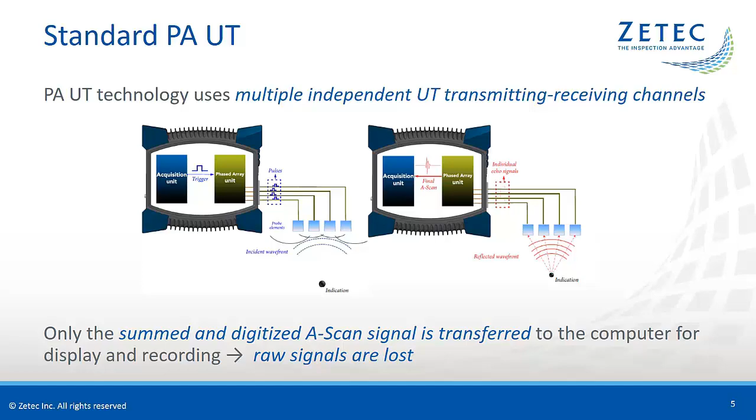This slide shows how it works in practice. The probe is positioned on a specimen, and the phased array equipment generates a group of summed A-scans that are displayed as a sector scan image with a range of beam angles to cover the volume and to detect the reflectors. This image is shown live on the screen of the unit and can also be saved during inspection.

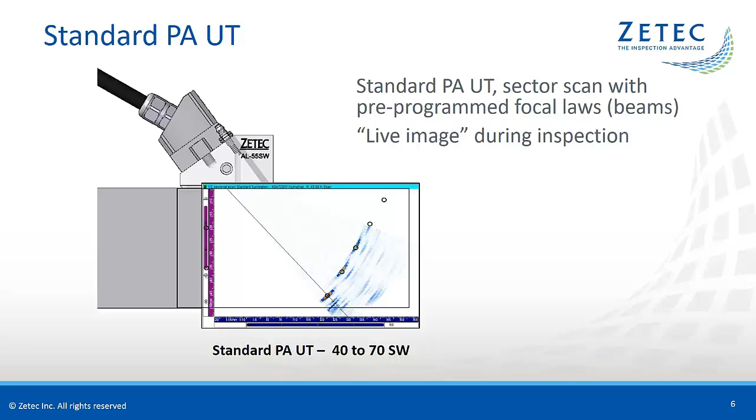After recording, we can apply processing, for instance, volumetric merge, but we cannot create additional focal laws. With the full matrix capture or FMC technique, the elementary A-scan signals from every transmitter-receiver pair are captured and recorded. Like the image on this slide shows, the elements of the probe are pulsed one by one, and for each pulse, the reflected signals are received on each element.

At the end of the sequence, for a probe with 4 elements, a matrix of 16 A-scan signals is recorded. For a more realistic situation, a probe with 64 elements, we will have a matrix of 4096 A-scans. From the raw A-scan signals, it is then possible to generate UT images for any given focal law in terms of aperture, angle, or focus depth, and for advanced focusing techniques through post-processing and recently also live during inspection.

Indeed, the underlying mathematics for the processing of FMC data was described more than 10 years ago. But in recent years, a drastic increase in processing power allows to perform the summing operations while the probe is moving over the component. So the time-consuming storage of elementary FMC data can be avoided, and the resulting inspection speed becomes comparable to standard phased array.

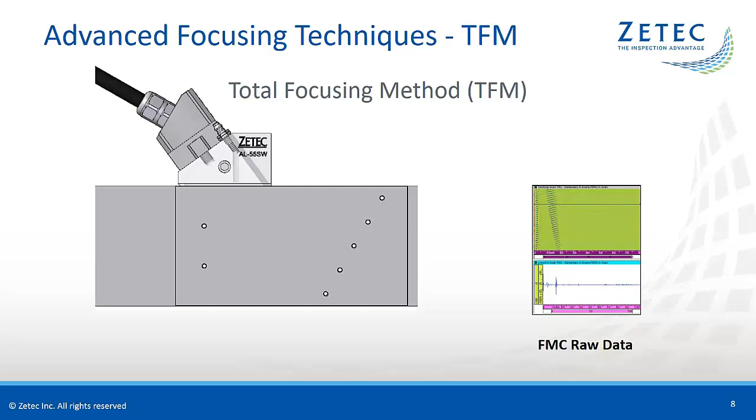The most commonly used advanced focusing algorithm is the total focusing method, or TFM. This animation explains how it works. The TFM algorithm sums the elementary A-scan signals from all elements in the array to generate a frame of pixels, where each pixel is computed using a dedicated focal law. The TFM frames can be used for live interpretation, or they can be stored for each position of the probe, very similar to a dynamic merge view in regular phased array.

In theory, ideal focusing is achieved in each point of the frame. But I will show later that the focusing capability of the technique still depends on the acoustic wavelength and the total aperture of the array. Therefore, some conditions must be met to effectively obtain ideal focusing.

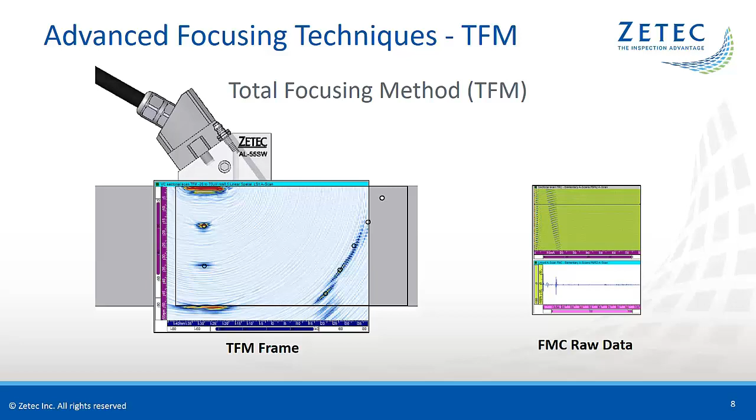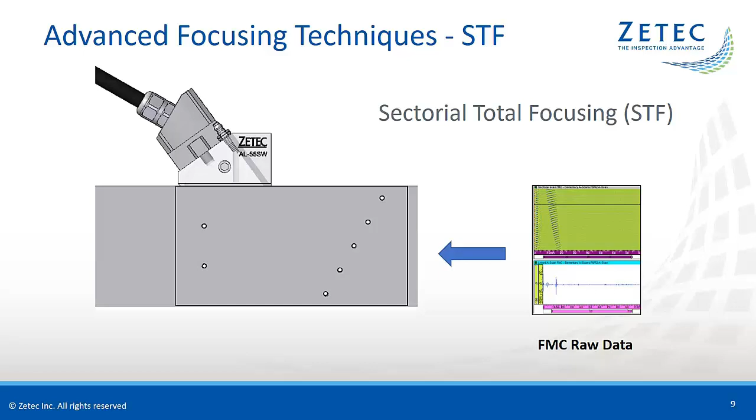The elementary A-scans from the FMC data recording can also be used with an alternative processing method to generate a sectorial sweep of A-scans while focusing in each point along the sound path. We will call this technique sectorial total focusing, and its physical principle is very similar to a DDF or dynamic depth focusing algorithm, applied both in transmission and in reception.

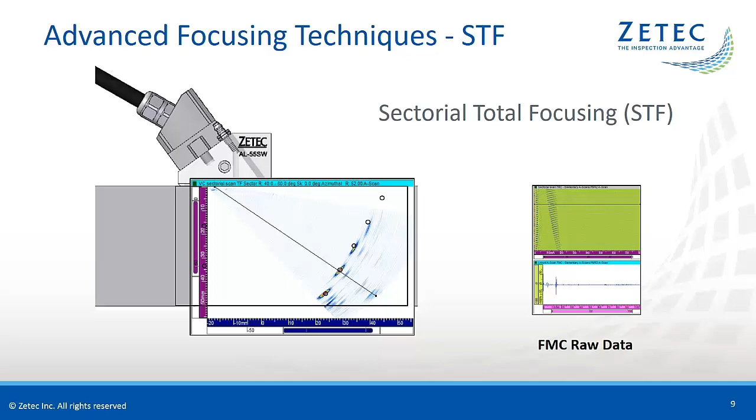Again, the operator can perform online data interpretation, or the images can be recorded during an encoded inspection sequence. The algorithm has the benefit of recording a summed A-scan signal for each angle, very similar to standard phased array, and this might facilitate its acceptance in codes and standards.

Let me now introduce Zetec's latest hardware innovation in phased array UT. At the end of last year, we launched the TOPAZ 64, a high-end, fully integrated portable unit. It has a 64-128 PR phased array configuration that allows for two-side inspection of thick welds with 64-element active aperture probes. This and the two separate conventional TOFD channels at 200 volts make it a best-in-class inspection system for code-compliant weld inspections using simultaneous phased array and TOFD.

But in addition, the TOPAZ 64 also offers best-in-class live high-resolution TFM and STF. The TOPAZ 64 allows to perform an encoded scan, motorized or manually driven, and records live TFM frames or STF sector scans at each position, just as we record sector scan images in standard phased array. After the recording, the TFM is available as an actual merged data group in UltraVision Touch, and the STF data can be exploited like a standard phased array sector scan.

In addition to the typical square pulse, 75 volts on 50 ohms, the system can also generate a bipolar pulse, 150 volts peak to peak on 50 ohms, with 40% more acoustic energy. Obviously, this contributes to the overall signal-to-noise ratio of the ultrasonic signals, either standard or generated from elementary A-scans. The unit is also capable of saving the raw FMC data for post-processing in UltraVision Classic. And like the other TOPAZ units, the TOPAZ 64 is controlled by the industry-proven embedded UltraVision Touch software.

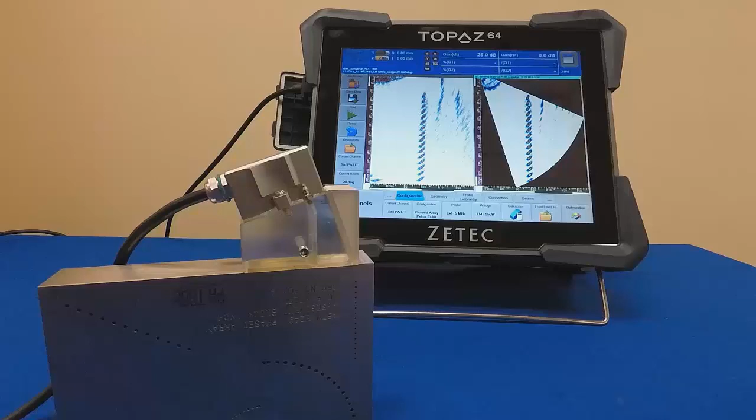Before looking at real flaws in the case studies, let me start by illustrating the benefits of advanced focusing techniques and the key parameters that allow to exploit the full potential of this new technology. I will use the well-known ASTM E2491 phased array reference block with different sets of side-drilled holes, and a typical 5 MHz linear array probe with 64 elements coupled to an L-wave wedge.

We are looking at ultrasonic images of a set of 1 mm diameter side-drilled holes located on a vertical line. Two channels are shown simultaneously on the TOPAZ 64. On the left side of the screen, we have a high-resolution TFM frame, 512 by 512 pixels, generated with the complete 64-element aperture of the probe.

The calculator in UV Touch shows the coverage of the frame relative to the specimen and makes it easy to set and adjust the parameters of the frame. On the right side of the screen, we have a standard phased array sector scan showing angles between 20 and 70 degree L waves and a resolution of 0.5 degrees. Again, the complete 64-element aperture is used. The standard phased array channel is focused in projection mode, just in front of the wedge.

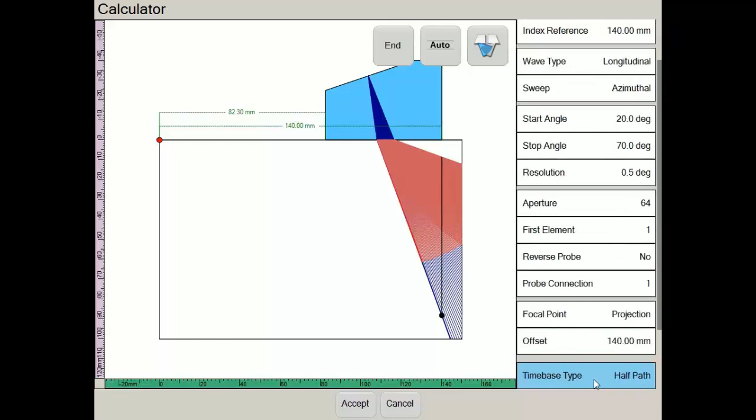In the starting position, we can see that the TFM algorithm, in combination with the large aperture of the probe, allows for ideal focusing on all reflectors. At this specific probe position, the standard phased array sector scan is also well focused on all reflectors and shows a similar, nearly perfect image.

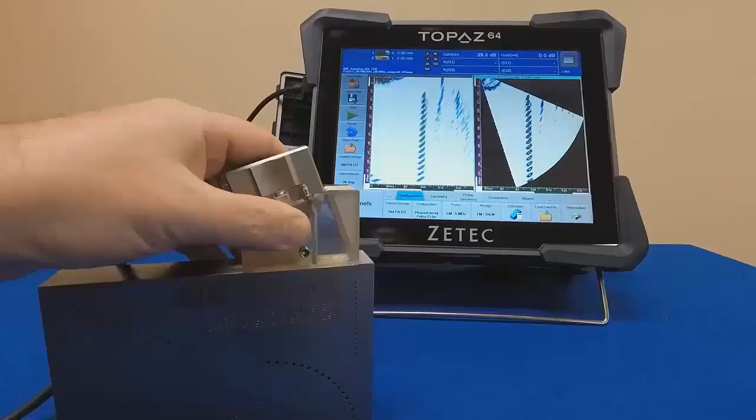When we start moving the probe by roughly 10 millimeters in one direction or the other, we can observe that the image provided by the standard phased array technique shows defocusing on most of the reflectors, simply because the sound field is focused elsewhere. On the other hand, for the TFM technique, nearly ideal focusing is conserved over a large range of probe positions. This clearly illustrates the capability of TFM to focus in the complete region of interest and not only on a predefined locus.

I have now replaced the TFM channel on the left side of the screen by an STF channel with the same angle sweep as the standard phased array channel. And we perform the same test again, starting from the ideal position for the standard phased array and moving the probe away from that position. And very similar to the live TFM technique, the live sectorial total focusing technique conserves nearly ideal focusing over a large range of probe positions.

As previously mentioned, the active aperture of the probe is a key parameter for the focusing capability. This slide clearly illustrates the influence of this active aperture on the TFM imaging. Live TFM images of the same set of side-drilled holes were recorded with different apertures. From left to right, 64, 32, and 16 elements of the probes were used to generate the TFM frames. The images show that a large aperture is required to fully benefit from the focusing power of the TFM algorithm, and the same can be demonstrated for the STF.

Indeed, even when advanced focusing algorithms are applied, the focusing capability is still limited to the near field of the probe. And this near field can be increased by selecting a probe with a larger active surface or a probe with a higher frequency. Let us now look at the influence of the TFM frame resolution on the detection capability and the reliability of the inspection.

We start from the same setup that we used a few minutes ago, showing a TFM frame of 512 by 512 pixels. We can see the TFM frame on the left side of the screen and the amplitude depth curve on the right side of the screen. This curve is like the A-scan signal of a virtual 0-degree probe in each horizontal position of the TFM frame. The different echoes represent the responses from the side-drilled holes, and we can see a regular sensitivity distribution.

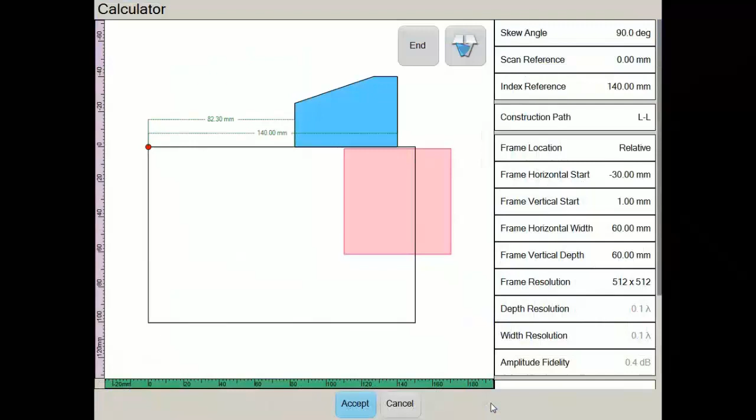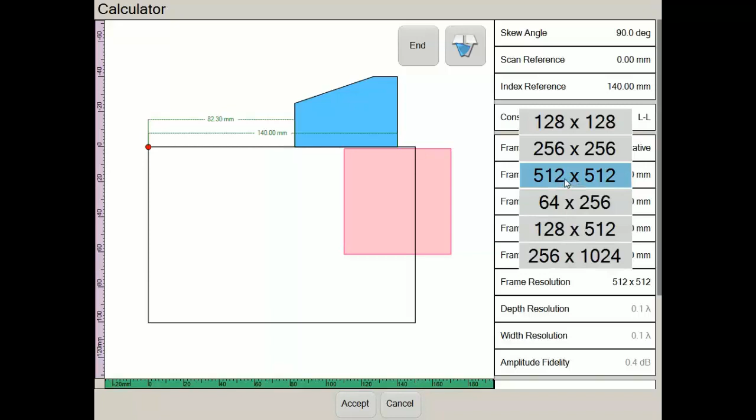If we go into the TFM calculator, we can see how to define and adjust the frame by defining the frame start and frame extent horizontally and vertically. The frame resolution will determine the depth and the width of the individual pixels in the frame. Let us now change the frame resolution to 128 by 128 and look at the image again. The TFM image has a very different aspect now. It looks pixelized. Also, the A-scan signal on the right shows irregular amplitudes for the echoes from the reflectors.

When moving the probe very slightly, actually less than a millimeter, we can observe random and important variations in the echo amplitudes, as if some reflectors are disappearing and reappearing. The pixelized aspect of the TFM frame can be improved by applying the smoothing feature available in UltraVision Touch, but the important amplitude variations remain. Obviously, an actual inspection with these parameter settings would be very unreliable and could leave flaws undetected. The TFM calculator in UltraVision Touch helps the operator understand and avoid this potential issue.

We can see that the pixel size for a 128 by 128 frame is as large as 4/10 of a wavelength. Using the wavelength as the unit for the pixel size may seem a little strange at first, but it avoids the UT operator having to calculate the wavelength for each of his probes and wave modes. From a physical reasoning, similar to the Nyquist or sampling theorem that the ASME code uses to determine the recommended digitizing frequency for standard UT and phased array inspections, the maximum possible amplitude error for a TFM frame can be calculated. We have implemented this principle in our software to automatically calculate the amplitude fidelity parameter to help the operator set up TFM configurations for reliable detection.

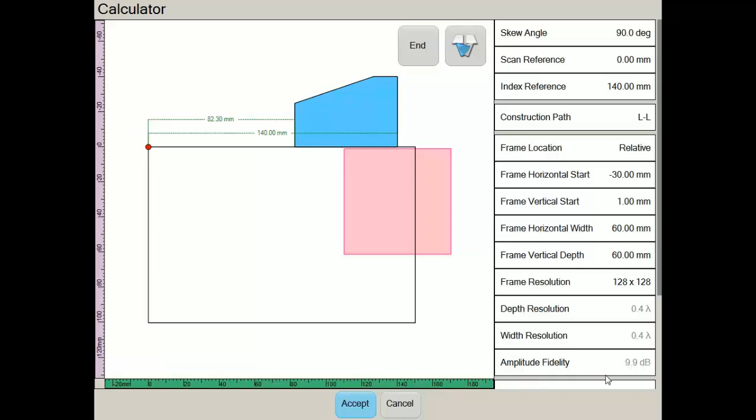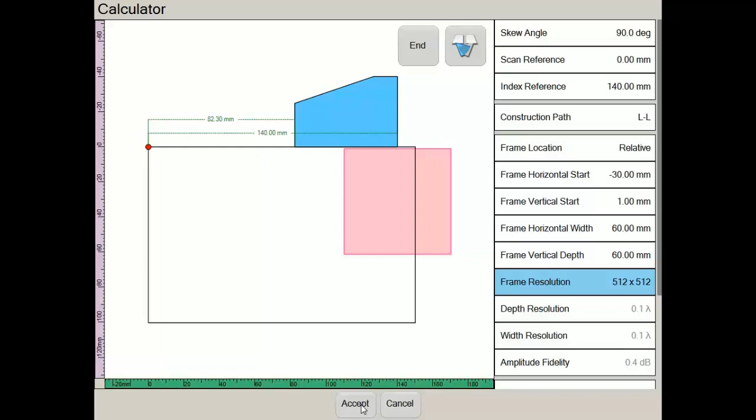For the given frame size and 128 by 128 resolution, we can see that the parameter is at almost 10 dB, which explains the important amplitude errors that we previously observed. If we go back to a 512 by 512 frame, we can see the pixel size reduced to a tenth of a wavelength, and the amplitude fidelity improved to less than 0.5 dB. Obviously, this setting results again in the initial high-resolution TFM image.

In the various working groups on the codification of FMC and TFM, the discussion about recommended pixel size is still ongoing, but at this time, an amplitude fidelity of 2 dB or better is considered a good compromise between reliability and inspection efficiency. I think this simple experiment clearly illustrates the importance of the TFM frame resolution, especially when inspecting thicker components.

Let us now move on to the case studies. In the first case study, we will evaluate the performance of the TFM technique on hydrogen-induced cracking. This is a common type of damage occurring in wet hydrogen sulfide refinery process environments, even at relatively low temperatures. Hydrogen-induced cracking is a kind of blistering damage that tends to form parallel to the surface. It becomes really damaging when it becomes extensive, or when it gives rise to cracking that propagates into a weld, or when it begins to go stepwise through the wall.

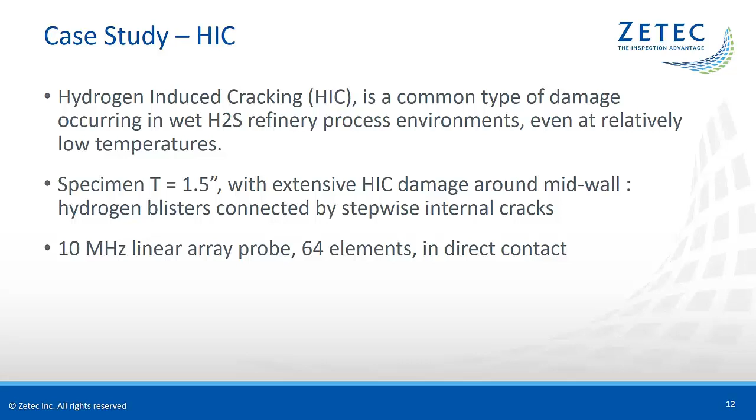The considered specimen is about 1.5 inch thick and has strong hydrogen damage around mid-wall, the typical blisters connected by stepwise internal cracks. A 10 MHz linear array probe with 64 elements was used for the examination, in direct contact with the specimen. This slide shows the UT images of the damage inside the specimen. On the left side, we see the image from a compound scan technique using L waves ranging from -15 to 15 degrees and an aperture of 32 elements.

On the right side, we see a TFM frame with 512 by 512 pixels, covering the same volume of the specimen. The damage in this specimen is so extensive that standard phased array has no difficulty detecting it. Indeed, the different blisters, essentially perpendicular to the ultrasonic beams, are very good reflectors. But the raw sector scan doesn't show the complete detail of the damage.

The data from the live TFM inspection provides a more accurate image of the stepwise internal cracks that connect the adjacent hydrogen blisters. In this case, the superior imaging of the TFM technique is obtained by the better focusing capability, but also because the original FMC data recording includes signals from a multitude of insonification angles on the reflectors that compose the damage.

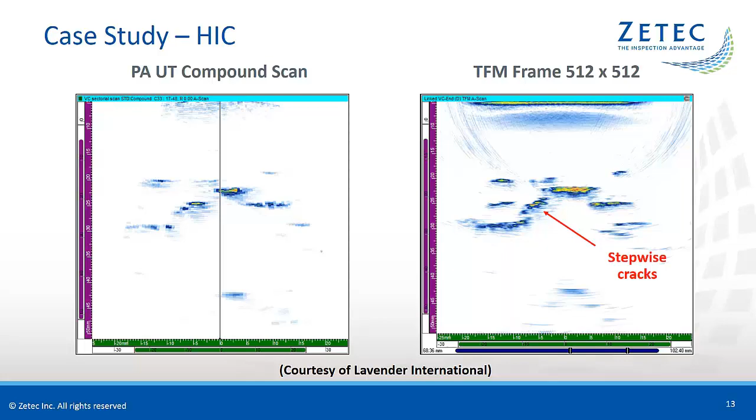High temperature hydrogen attack, or HTHA, is another hydrogen-related damage mechanism. This problem concerns steels operating at elevated temperatures, above 400 Fahrenheit, in hydrogen environments in refinery, petrochemical, and chemical facilities. HTHA is the result of hydrogen dissociating and dissolving in the steel, and then reacting with the carbides to form methane, which cannot diffuse out of the steel. The methane accumulates at grain boundaries and eventually leads to the fissures and cracking typical of HTHA.

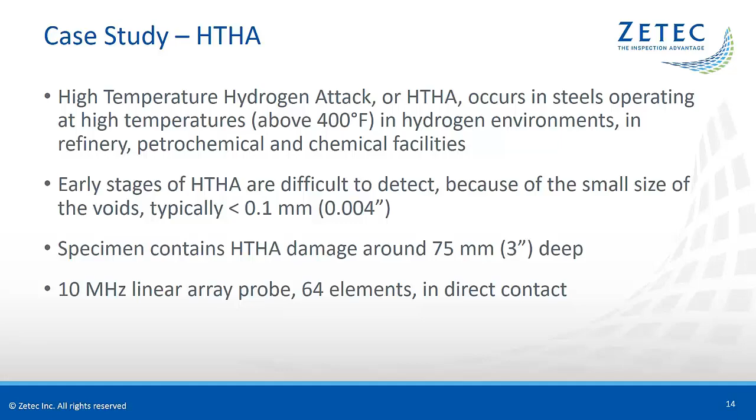Early stages of HTHA are very difficult to detect because of the small size of the voids, typically smaller than a tenth of a millimeter. The considered specimen contains important HTHA damage at the depth of roughly 3 inches. The same 10 MHz linear array probe from our first case study was used. This slide shows the recorded TFM data on the specimen, again with frames of 512 by 512 pixels. We can observe that the high frequency probe, in combination with the TFM focusing, allows to detect reflectors several times smaller than the wavelength.

Industry experts consider that the excellent focusing capability of TFM is an important tool for earlier detection and better characterization of HTHA. Still, in view of an efficient and reliable inspection strategy for this damage mechanism, TFM is likely to be combined with other ultrasonic techniques like TOFD. With TOPAZ 64, all required techniques can be implemented on the same portable unit.

The next case study will illustrate the flexibility and the performance of TOPAZ 64 and UltraVision Touch in using live TFM for weld inspection. For our trial, we have a carbon steel weld specimen with a wall thickness of 19 millimeters or 3/4 of an inch. It contains typical manufacturing flaws: lack of fusion, incomplete penetration, a toe crack, and a cluster of porosity. The weld will be inspected with TFM from both sides in a single scanning sequence.

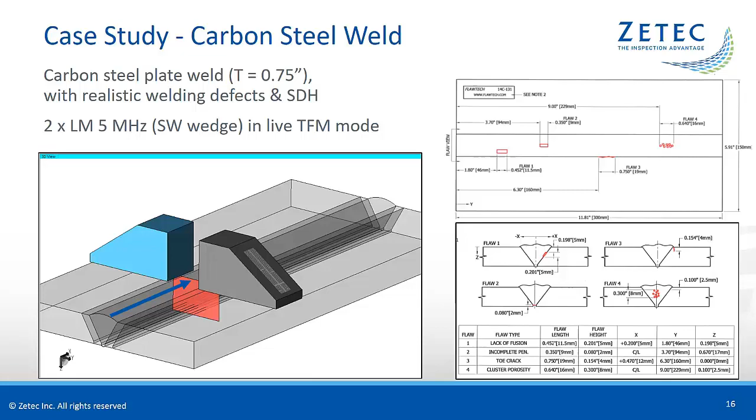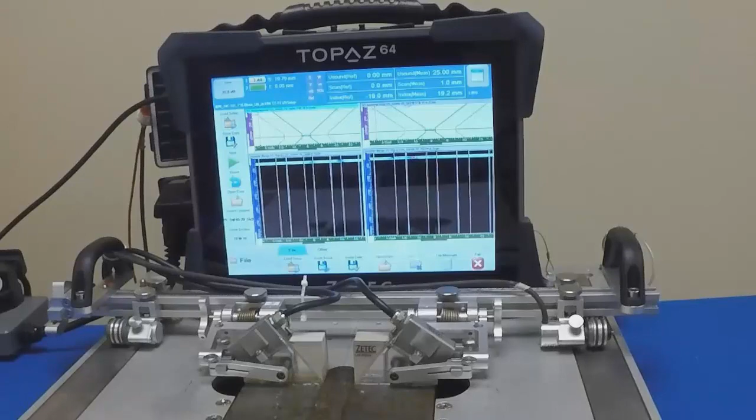The Zetec weld crawler is used to carry the probes for this one-line scanning sequence. But the TOPAZ 64 and the onboard software also integrate smoothly with other encoded and motorized scanning mechanisms. In this case study, only the live TFM frames are recorded. No raw FMC data will be stored.

This allows for a scanning speed around 25 millimeters per second, while recording frames every millimeter. This is only slightly slower compared to two-sided standard phased array with similar inspection parameters. The live TFM data file size for this type of weld is around 350 megabytes for a weld length of 1 meter. This is roughly double the size of the standard phased array.

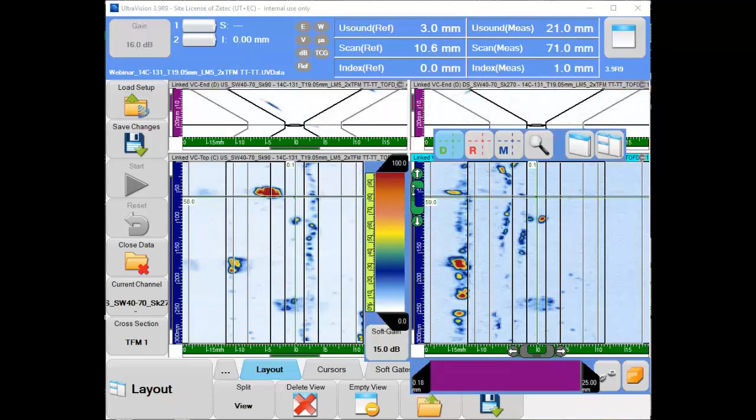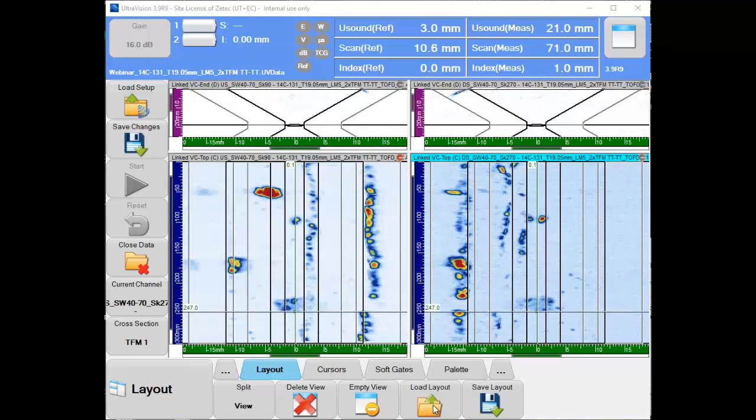After recording, the UltraVision Touch software can be used to review the data, either on the TOPAZ 64 unit or on a separate computer. Upon loading the data file, we get an overview of the two TFM channels for upstream and downstream. By moving the data cursor along the scan axis, the 4 manufacturing flaws are clearly detected on the TFM frames. Since each of the TFM data groups includes full volumetric data, we can also use the projection views for efficient analysis of each indication and for flaw characterization and sizing.

The recorded TFM data groups have exactly the same format as the results from a volumetric merge operation. It is easy to use the projection gates to isolate and visualize individual flaws, like the near surface toe crack with well-resolved corner and tip signals. We can also observe the capability of the TFM technique to provide better resolution for imaging the cluster of porosity compared to standard phased array.

Let's now move on to a case study performed to explore the potential of advanced focusing techniques on thick carbon steel vessel welds, let's say from 3 inches and up. We know that code-compliant phased array UT and TOFD can provide adequate detection, but the characterization of deeper indications can be sometimes challenging. The considered specimen is a thick carbon steel weld containing real flaws, a root crack, and a cluster of shrinkages, located at different depths in the weld.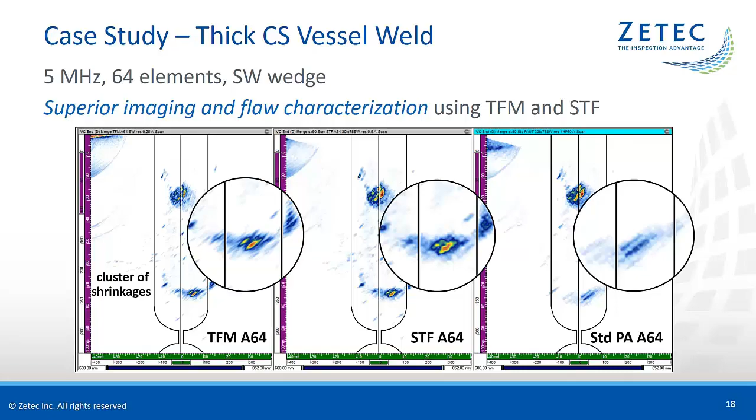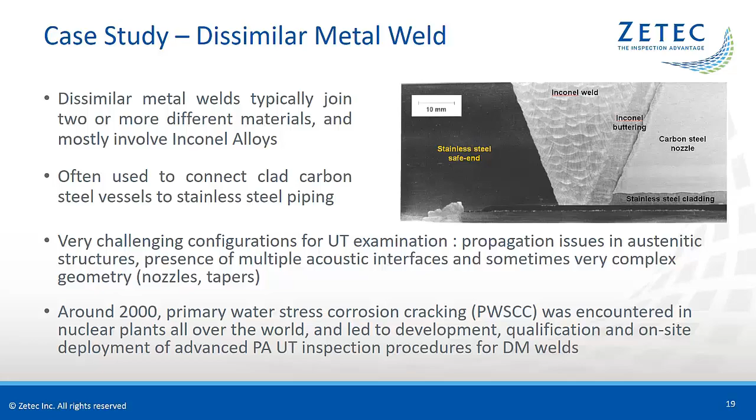Around the year 2000, a new damage mechanism called primary water stress corrosion cracking, or PWSCC, was encountered in nuclear plants all over the world and led to the development of advanced phased array inspection procedures for dissimilar metal welds. Zetec collaborated with EPRI in 2005 to formally qualify the first phased array procedure for in-service inspection of dissimilar metal welds.

Qualified inspection techniques for DM welds are typically based on 1.5 MHz dual 2D matrix array probes, generating L waves for better propagation in the coarse grain austenitic material. The dual transmit-receive configuration offers better sensitivity and signal-to-noise ratio due to the convolution of transmitter and receiver beams, and avoids ghost echoes caused by internal wedge reflections. In our case study, we used a dissimilar metal weld practice specimen made available by the EPRI NDE Center in Charlotte. The specimen has a wall thickness of 1.2 inches, and it contains a large branched ID surface breaking crack.

The qualified techniques have no problem detecting this large flaw, but the objective of our trial was to explore the potential of advanced focusing techniques for improving flaw characterization and sizing. For this purpose, we used a recently designed large aperture DMA probe at 1.5 MHz.

Both transmitter and receiver arrays have a 10 by 6 element configuration, and this probe assembly can be driven by the TOPAZ 64 system. The image on this slide shows the acoustic beam for standard phased array focused near the ID surface and the intended morphology of the branched ID crack.

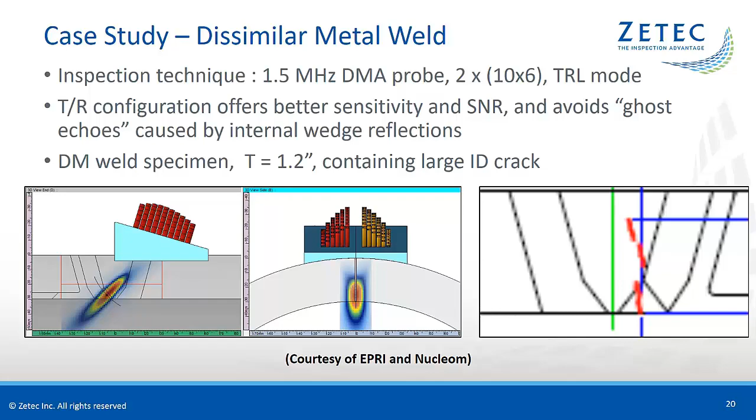For this laboratory study, we decided to record elementary FMC data together with a standard phased array channel set up according to existing best practice, with L-wave beams from 35 to 70 degrees. The probe I just discussed was used at full aperture for the 2 techniques. We will use the UltraVision Classic software to review the data and to perform post-processing of the raw FMC data with different advanced focusing algorithms.

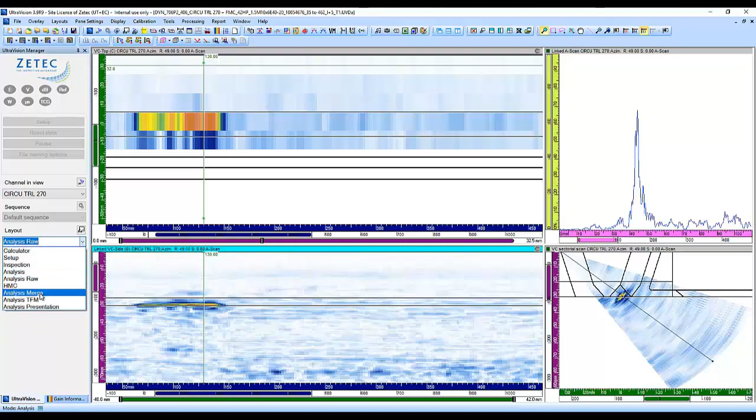So let us first look at the recorded data from the different techniques. Here we see the standard phased array data, and when we move the data cursor to the zone of the flaw, it becomes visible on the sectorial scan at the bottom right of the screen and on the A-scan signal just above. As I mentioned in previous webinars, the volumetric merge tool facilitates efficient data analysis and flaw evaluation.

The merge operation has already been performed in this case, and this is how the merged data from the standard phased array looks. The corner trap of the large crack is very well detected because the lower angles of the sector scan are typically focused near the ID. The upper part of the crack is visible and can be enhanced by using some soft gain, but the image is incomplete for this very high crack.

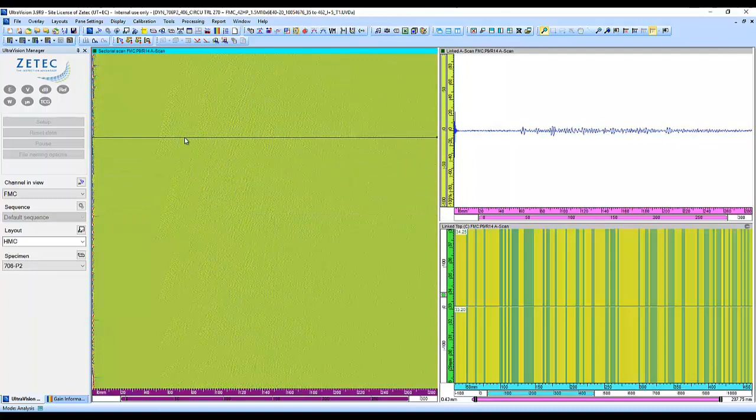Like I said, we also recorded elementary FMC A-scans, and in the raw form, the data looks like this. Obviously, these signals cannot be interpreted by the human mind, so processing is required. The advanced calculator in UltraVision Classic has all the tools to facilitate this process.

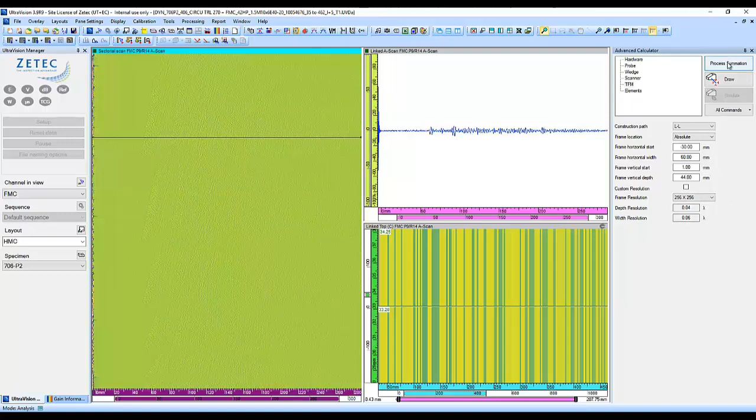We need to select the TFM Pitch and Catch option in the Probe tab and then go to the TFM tab. Very similar to what we saw in UltraVision Touch, the TFM frame is defined by its horizontal and vertical start and extent, and by the pixel count. With this low frequency probe, a 256 by 256 frame will be sufficient to obtain good amplitude fidelity. And now we can hit the process summation button to start the TFM reconstruction algorithm.

For better comparison, I will show the merged data from the standard phased array on top of the screen and the processed TFM data at the bottom of the screen. We can see that the image of the corner trap is almost identical, but we now get a complete image of the upper part of the crack. These signals allow us to size the crack accurately within less than a millimeter of its actual through-wall size. Also, some other facets of the branched crack clearly stand out from the ultrasonic noise.

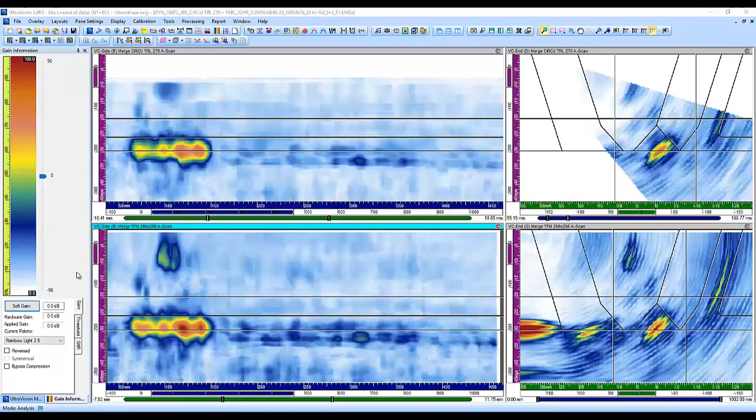We have also used the STF algorithm to process the same FMC data, this time generating a totally focused sectorial scan from 20 to 80-degree L waves. I will now show this data on top of the screen instead of the standard phased array. And we can see that the results of TFM and STF are very similar.

This last case study has shown that the FMC data capture technique can also be applied with dual 2D matrix array probes. Also, we have seen that TFM and STF images reconstructed from elementary A-scan signals can provide good ultrasonic data through attenuating materials and have the potential to improve flaw characterization and sizing.

From all the information and the various case studies presented in our webinar today, we can draw the following conclusions. Advanced focusing techniques are a promising additional tool in the phased array UT toolkit. They can improve the resolution of flaw images and increase the inspection coverage with focused beams. Active aperture and frame resolution are key parameters and must be carefully selected to exploit the full potential of the technique. Selection of appropriate probes in terms of frequency and wave mode remains a mandatory requirement for successful inspections.